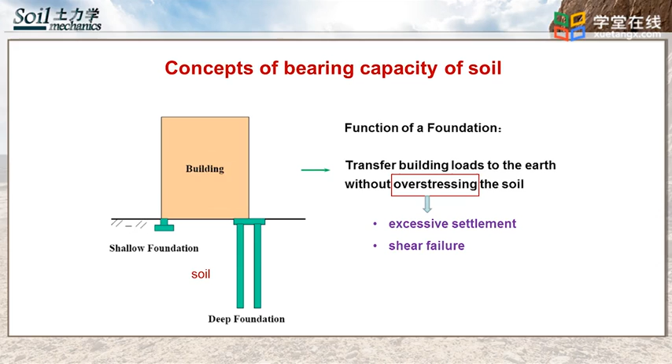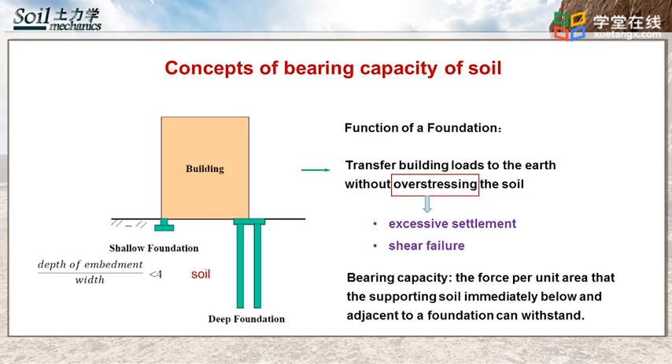Here, the bearing capacity is defined as the force per unit area that the supporting soil immediately below and adjacent to a foundation can withstand. Depending on the structure and the soil encountered, various types of foundation are used, such as spread footing, mat foundation, piles, etc. We normally divide them into two types: shallow foundation and deep foundation. In a more general sense, shallow foundations are those where the ratio of the depth of embedment to width is approximately less than 4. When the ratio is greater than 4, it may be classified as a deep foundation. In this chapter, we discuss the soil bearing capacity for shallow foundations.

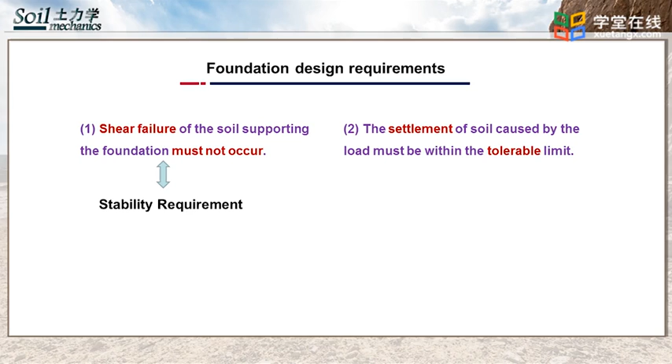As mentioned before, for a foundation to function properly, we have to make sure of two things. 1. Shear failure of the soil supporting the foundation must not occur. And 2. The settlement of soil caused by load must be within a tolerable limit. The first aspect indicates the foundation must meet the stability requirement in design, which means the foundation soil must be strong enough to support imposed loads, and the foundation must be safe against collapse under maximum loads. If the foundation soil is bearing a maximum load without shear failure, we call it an ultimate limit state.

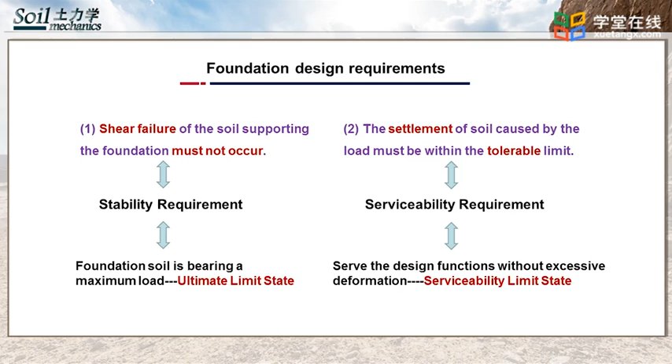The second aspect relates to the serviceability requirement in design, which means the foundation must maintain normal service conditions in the service period. The soil has no excessive deformation, including the total settlement and differential settlement. If the deformation reaches a limit value that affects normal function, we call it a serviceability limit state. For the stability requirement, if the foundation reaches the ultimate limit state, the geotechnical system is likely to become unstable, resulting in structural damage locally or globally.

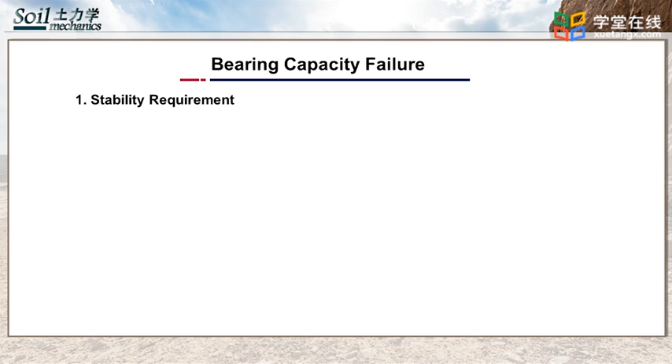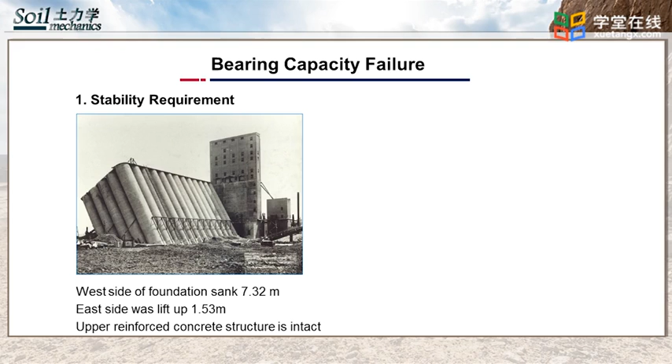To get a clearer idea about this problem, let's see an example of a foundation failure that happened in Canada: the Transcona grain elevator, which is very typical and has been mentioned in many textbooks. This picture shows an obvious inclination of the building. The west side of the foundation sank 7.32 meters, and the east side was lifted up 1.53 meters, while the upper reinforced concrete structure is intact. This diagram depicts the failure mode of the building. The upper building inclined. One side of the subsoil was upheaved. The structure of the foundation was damaged due to the soil slipping along a probable arc shear surface.

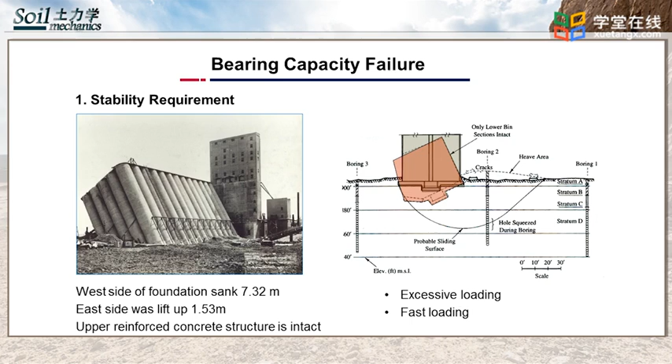There are two main reasons for its instability. For one thing, after failure, investigation revealed that there was 15 meters of soft clay below the foundation. The actual base pressure on the foundation soil was about 329 kPa, which surpassed the bearing capacity of the foundation soil, 277 kPa. It is beyond the stability requirement. For another, the loading speed was too fast. As a result, the pore water couldn't drain out in time and the soil strength couldn't be enhanced effectively.

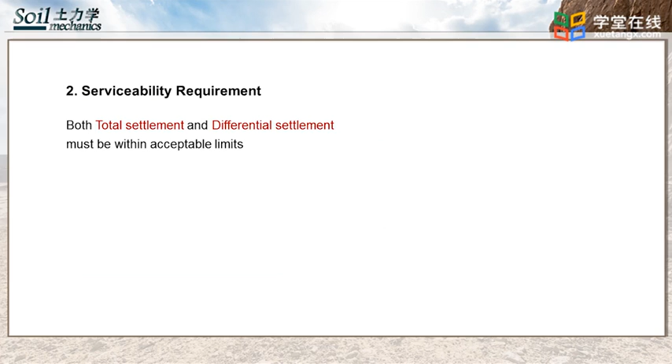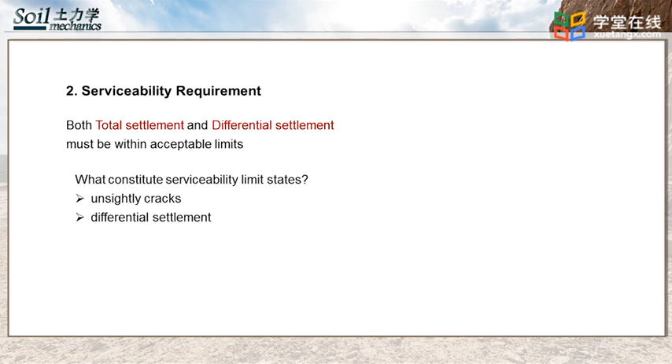In terms of the serviceability requirement, both the total settlement and the differential settlement must be within acceptable limits. What constitutes serviceability limit states? Here are a few markers: unsightly cracks, differential settlement, excessive total settlement, intolerable vibration, intolerable lateral displacement, and rotations. This picture shows a typical example of an excessive differential settlement of a road foundation. The surface is bumpy, and a group of cracks appeared on it. It is out of the serviceability requirement, and the foundation failed.

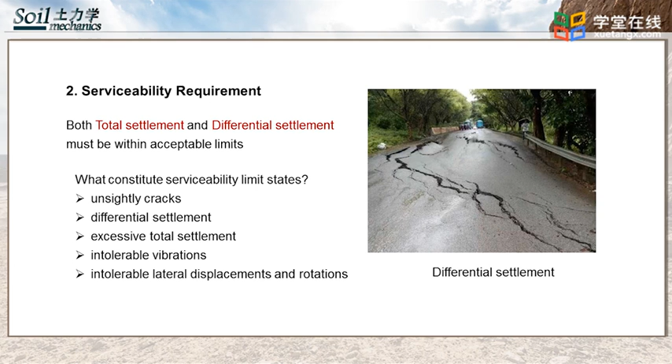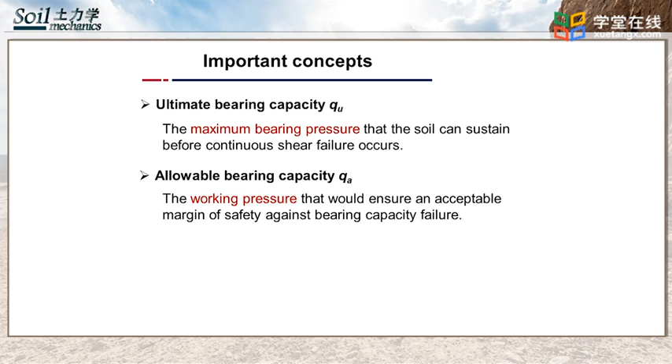Having got the idea of the stability requirement and the serviceability requirement, there are two important factors corresponding to them respectively. The first one is the ultimate bearing capacity qu, which is defined as the maximum bearing pressure that the soil can sustain before continuous shear failure occurs. The second one is the allowable bearing capacity qa, which is defined as the working pressure that would ensure an acceptable margin of safety against bearing capacity failure. Therefore, the factor of safety of the foundation soil can be defined as Fs equals qu over qa.

During the design of buildings and foundations, the factor of safety is usually determined according to their safety level. So, the allowable bearing capacity can be calculated by the equation qa equals qu over Fs. Then, how to get qu? It can be tested by field experiment or calculated according to the relevant formulas. We will explain it in detail in later chapters.